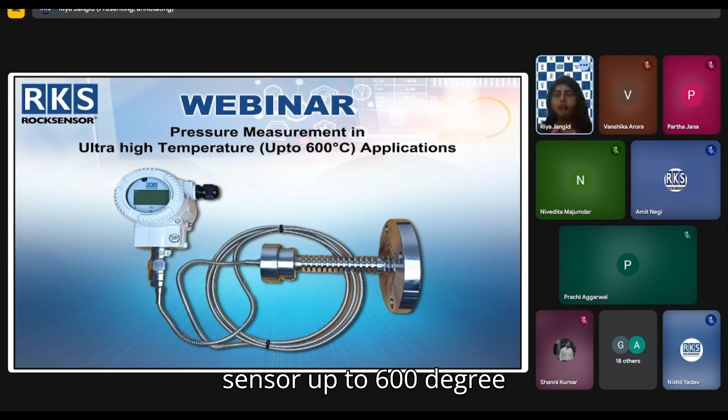Okay, so today's topic is pressure measurement solutions by Rocksensor up to 600 degrees Celsius. We have the smart solutions and the miniature version for industries where pressure measurement is required. So here are some solutions. You can see the images - this is our smart series and this is our miniature series.

Now, today what are we going to learn? We are going to learn the importance of pressure measurement and the types of pressure we deal in - gauge, absolute, differential pressure. What is the technology Rocksensor is currently using, and what products are we offering? What will be the application in the industry? What can we suggest to our clients? What can we guide our clients on? So this is the learning for today's session.

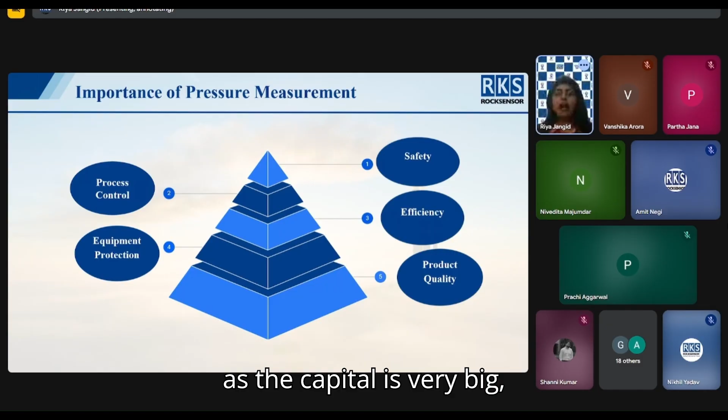First of all, we need to understand the importance of pressure measurement. In an industry, the capital is very big, right? We are investing our efforts, time, money - everything - in the industry. So we need a good quality product; its output must be efficient. These factors are based on some basic parameters on which the industry runs, like pressure, flow, level, temperature, and gas emissions into the atmosphere.

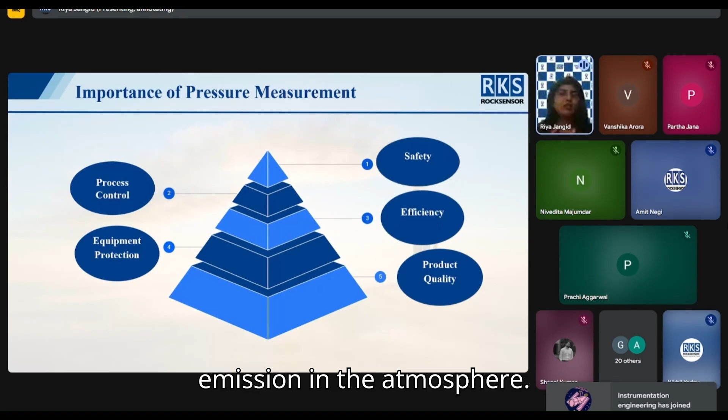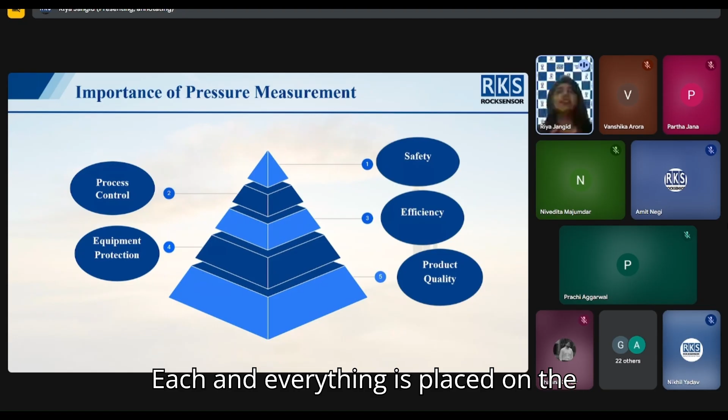So why is it necessary? First of all, it assures process control and safety in the industry. Second, we have efficiency and good product quality. As a general example, if you're baking a cake at home and the temperature or pressure is different, the cake will get burned or something will happen and the taste won't be good. Similar things happen in the industry, so it's very necessary to ensure the parameters that run the industry. Equipment protection is also there - everything is based on measurement, right?

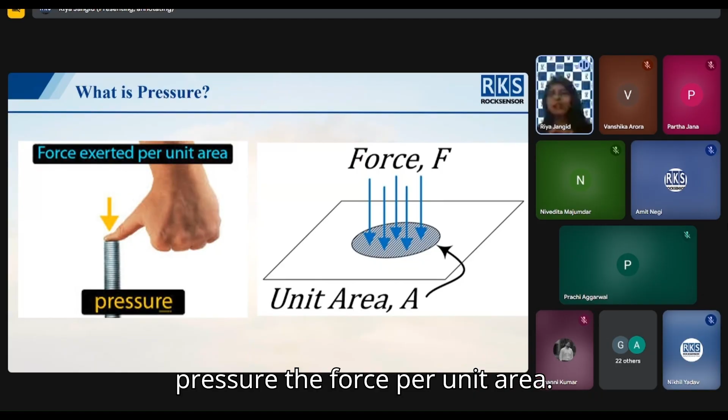Now, what is pressure? We already know pressure is force per unit area. Now how are we going to use this in our transmitter? There's the process, the things we use in this transmitter - we have different types of pressure measurement applications, and the pressures are different. So first we learn the types of pressure: gauge, absolute, and differential pressure.

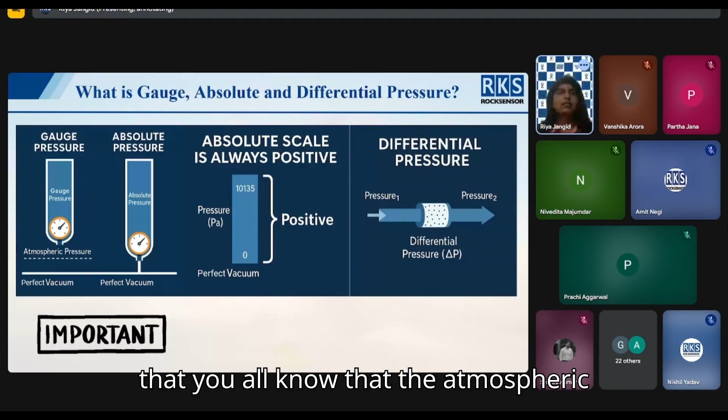What is gauge pressure? Gauge pressure is always measured with respect to atmospheric pressure. Now, as you all know, atmospheric pressure gets affected by altitude. The atmospheric pressure will be lower at higher altitude and higher at low altitude. So gauge pressure is directly affected by, or measured with respect to, atmospheric pressure.

Now, absolute pressure - the reference for this is perfect vacuum, which is minus 760 mmHg, right? Now what is the absolute scale? The gauge pressure can be negative or positive - the maximum it goes in the negative is minus 1 bar - but the absolute scale will always be positive, it cannot be on a negative scale.

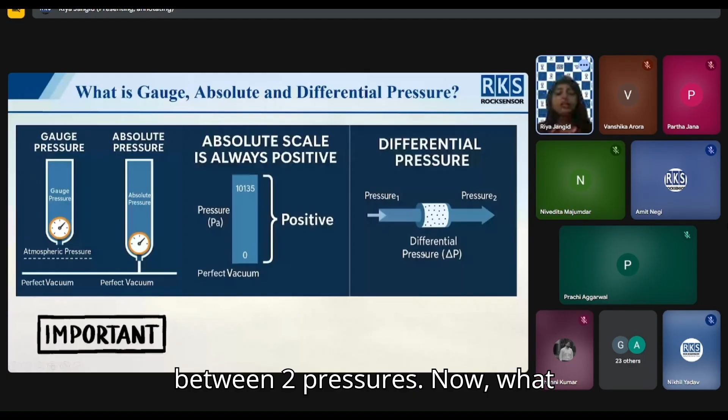Now, what is differential pressure? As the name suggests, differential pressure is the pressure between two points - one point at the higher side and one at the lower side. So it will always measure the difference between two pressures. Now the important thing here is that minus 1 bar, or minus 1 kg per centimeter square, is never a perfect vacuum.

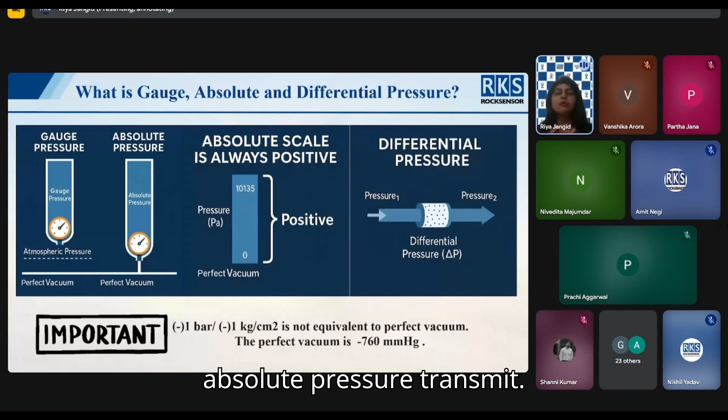A perfect vacuum is always minus 760 mmHg that we have to make our clients and users understand, the common thing for an absolute pressure transmitter.

Now moving ahead, what is the technology we are using? The technology is based on the monocrystalline piezoresistive silicon sensor. This is the transmitter, these are the parts of the transmitter, and this is the monocrystalline silicon pressure sensor.

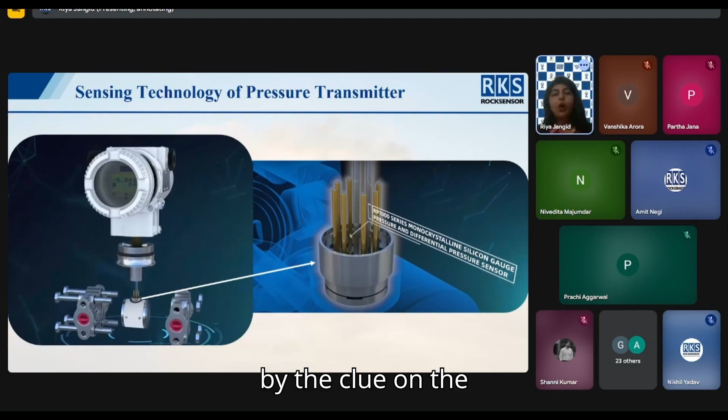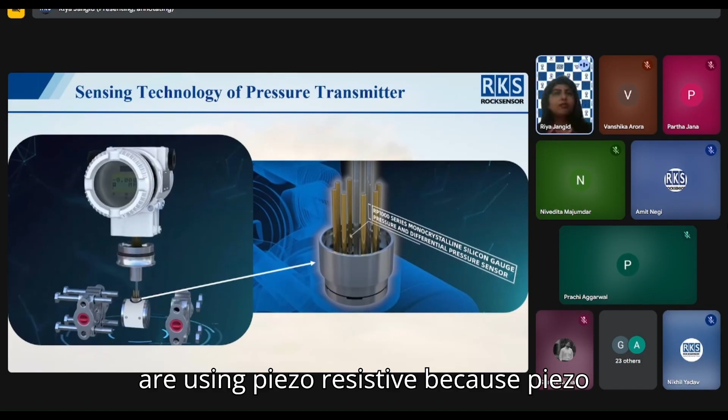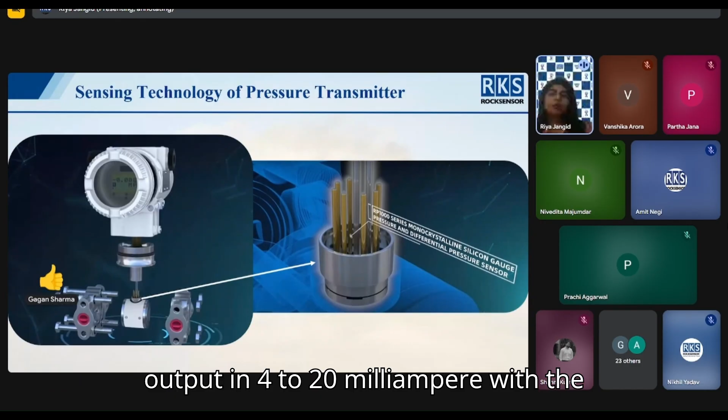Why we are using piezoresistive sensor? The pressure exerted by the fluid on the diaphragm is directly converted into the output signal of 4 to 20 milliampere. Piezo means pressure and resistive means resistive. Through this, we can easily measure the output in 4 to 20 milliampere with the help of a microprocessor because it is based on electronics.

Piezoresistive technology is based on the Wheatstone bridge. As we know, the Wheatstone bridge contains four resistances in which one is unknown. This unknown resistance is determined by the applied pressure of the fluid, and this results in our output.

Now, in the smart series pressure transmitter, we have gauge pressure transmitter, absolute pressure transmitter, and differential pressure transmitter. What features are we offering? First, we have high accuracy of 0.035% for these series, with temperature up to 120 degrees Celsius.

We have ATEX, CE, SIL certifications, NAMUR compliance, and IP67 rating. It is HART available, and has reverse polarity surge protection and anti-lightning function. It has push buttons on top of the transmitter, and you can easily configure or change settings through these push buttons.

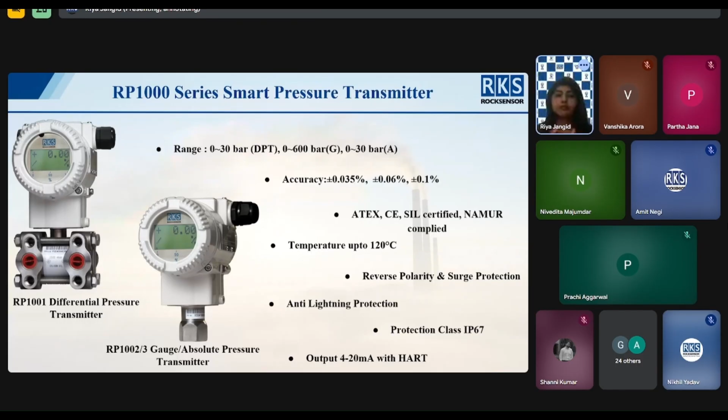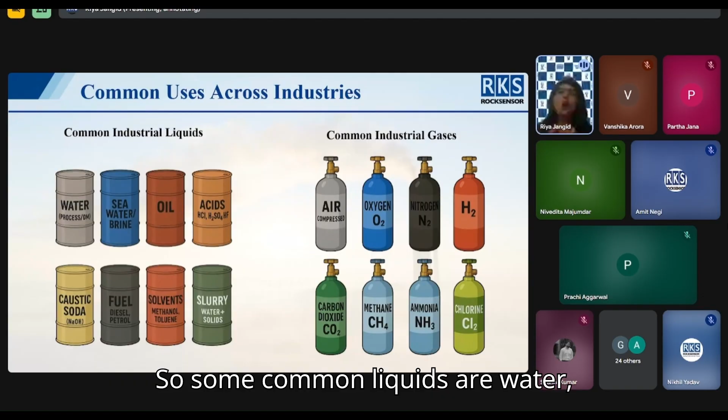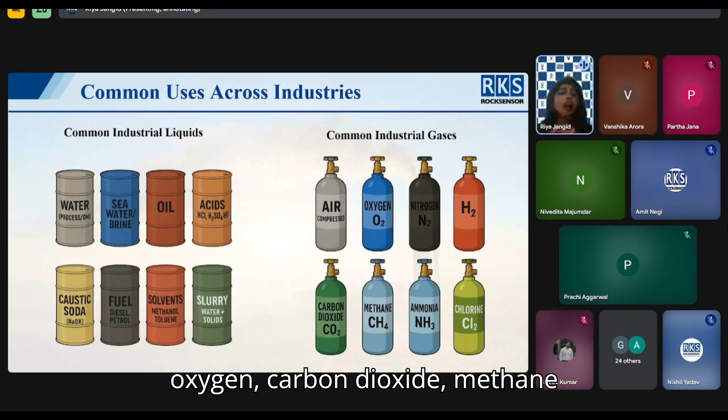Now, what are the common uses across industries? The transmitters can be used for liquids as well as gases. Common liquids are water, solvents, slurries, acids, and common industrial gases are nitrogen, hydrogen, oxygen, carbon dioxide, methane, and air, including compressed air.

Some applications can be handled like steam, where we can use impulse tubing, siphons, or condensate pots to lower the temperature, and then directly use the smart type PT. But some applications involve acids, or the process only requires high temperature, and we cannot directly use that. So here is the solution.

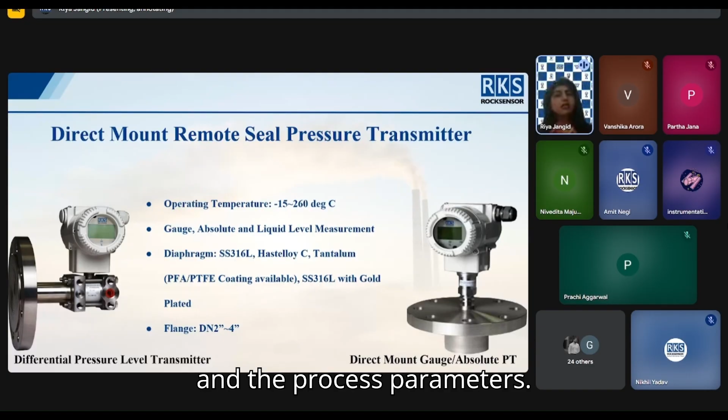Now moving ahead with the remote seal type pressure transmitter with capillary. In the previous type, the transmitter is directly mounted with no need for a mounting arrangement; the flange mounts directly in the process and the diaphragm contacts the media directly. In this case, we need to use a mounting arrangement because it is available with capillary.

The flange goes inside the process with the diaphragm in contact with the media, and through the capillary we can mount the transmitter in a remote area, at a distance of 1 meter, 2 meter, or 3 meter, depending upon the capillary length we provide to the client.

So we can use these transmitters directly; the application is the same where high temperature needs to be measured. The earlier one offered up to 260 degrees Celsius; this one is on the higher side, up to 350 degrees Celsius, and it can also be used from -100 to 100 degrees Celsius for cryogenic applications.

It is also available with different types of diaphragms: SS316L, Hastelloy, tantalum with a coating of PFA or PTFE. Flange size can be customized, and it has a capillary up to 12 meters.

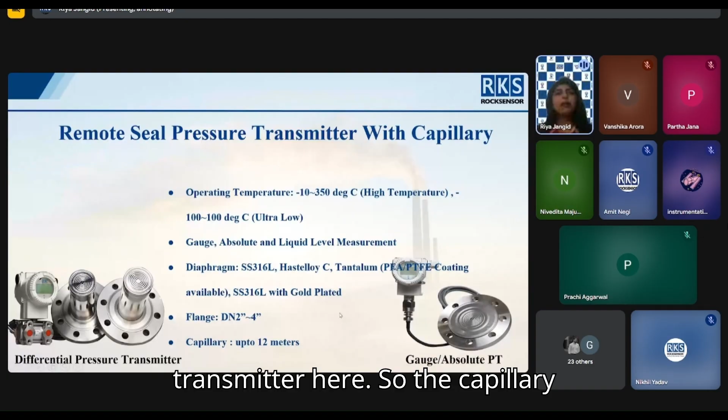So the capillary material is SS304. It is the standard one, and application in the industry. The application is similar to the previous one. It's just that depending upon the temperature, which process requires what temperature, what is the maximum temperature of that process, we have to choose wisely the solution.

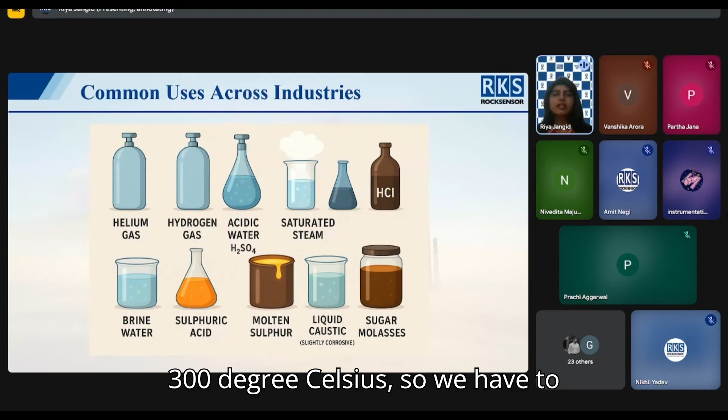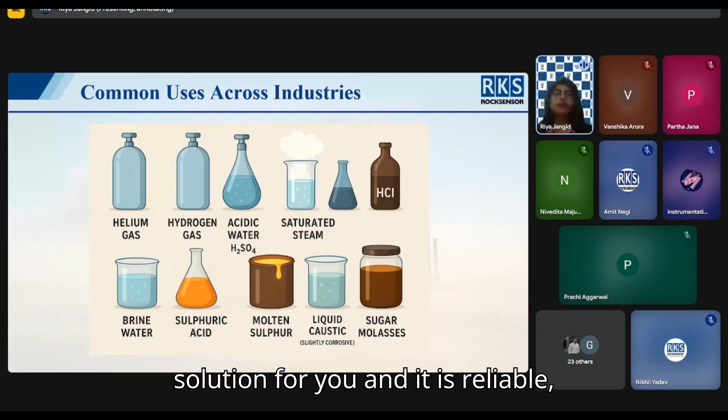So if the process temperature is 300 degrees Celsius, we have to wisely choose our remote seal type pressure transmitter, and also make the client understand that this is the best solution for you and it is reliable, accurate for your process to provide accurate pressure readings.

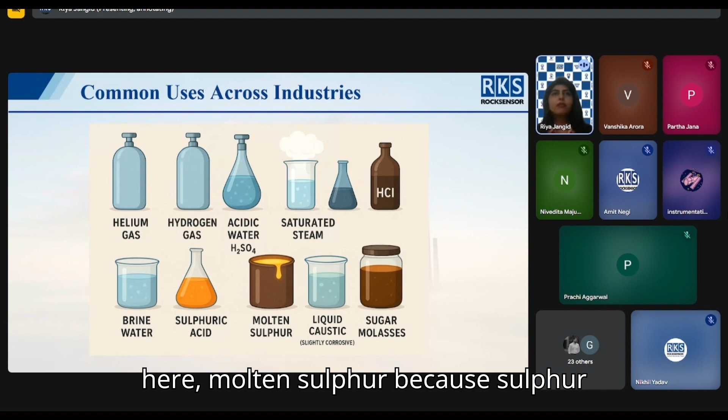So some common applications are mentioned here: molten sulfur, because sulfur temperature is already high, sulfuric acid, brine water, hydrogen gas, acidic water, sugar molasses. These are some common applications across the industries.

Now, the major application which we are going to discuss is hydrogen. As you all are aware, our government is empowering hydrogen power. It is the clean and green energy for the future. We are empowering our future, generating fuel through hydrogen.

Now, how is pressure measurement done in case of hydrogen gas? The challenge in hydrogen is that if we use the material directly with the hydrogen, for example SS material, it will cause hydrogen embrittlement. The hydrogen molecules are very small in size. They directly permeate the material surface and make cracks on it. So hydrogen atoms can easily go inside the surface of the material. For example, if you use SS as a material, it can easily go inside it, crack the diaphragm there, and cause leakage of the oil filling fluid inside the transmitter.

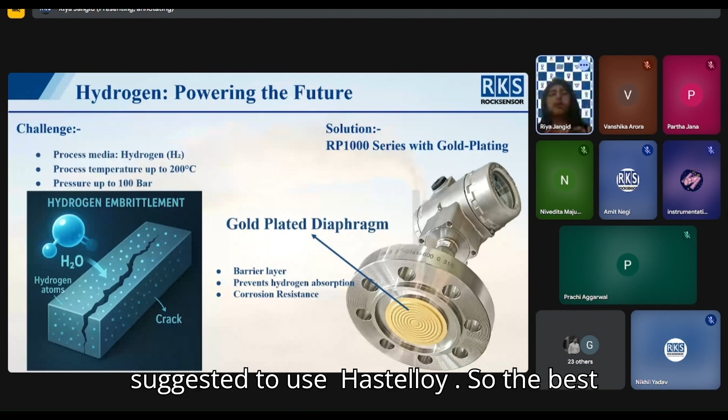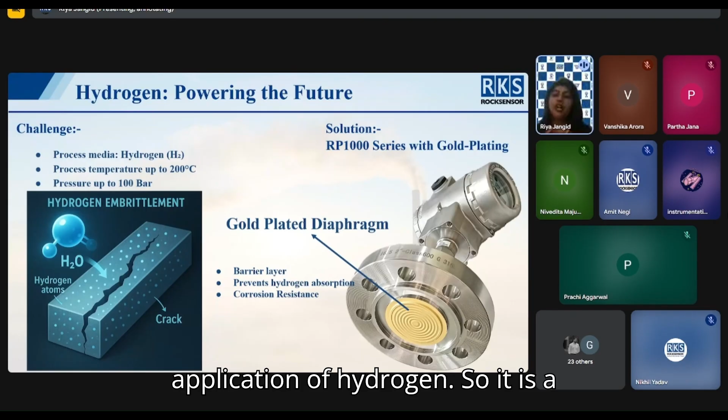And Hastelloy can be used for a shorter span of time, but it is also not suggested. So the best solution is the gold plated transmitter, which can easily be used to measure pressure in hydrogen applications. It is a great product. You can easily tell your clients that we use such innovative products because hydrogen is the future of the industry, and we can easily use this transmitter to measure the pressure.

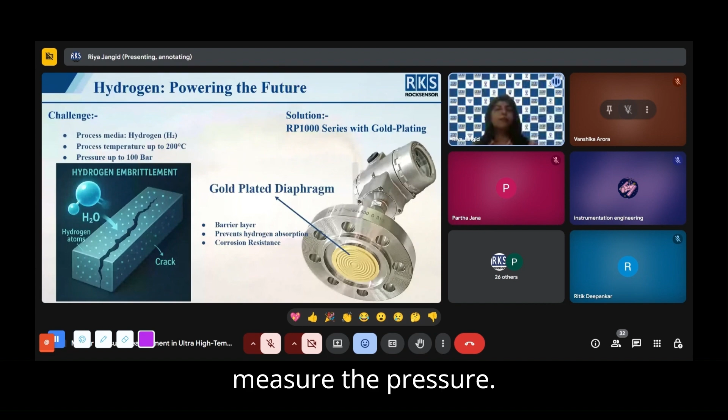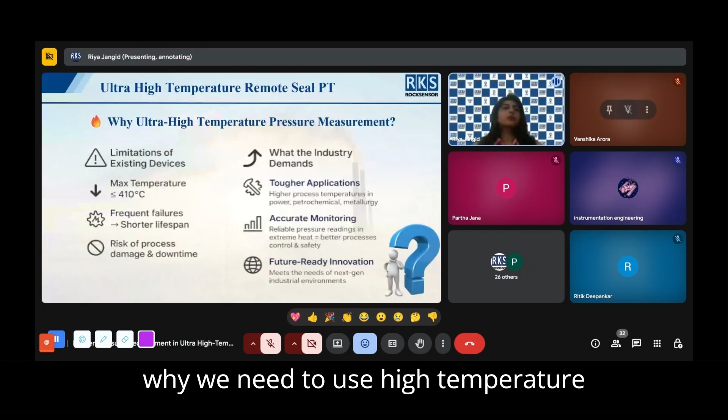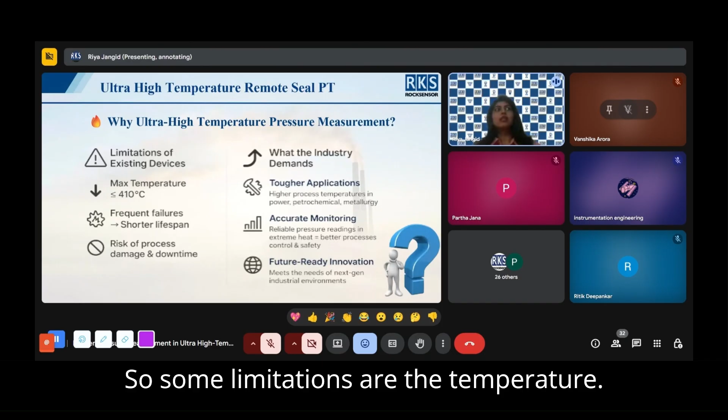Now we are moving ahead with our high temperature solution. Why do we need high temperature pressure measurement? We have so many limitations in the industry. Some limitations are related to temperature. Some devices exist with a limitation of 400 or 450 degrees Celsius, and the maximum temperature is up to 410.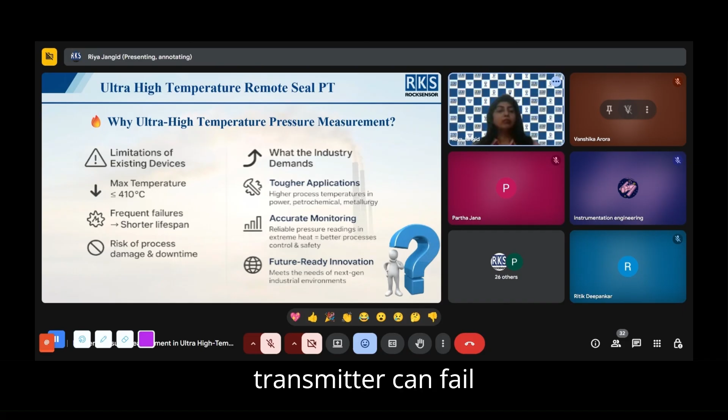Due to wide exposure to the atmosphere or to high pressure and high temperature, the transmitter can fail in that case, and there will be a shorter lifespan of the transmitter. This will increase the damage of the process.

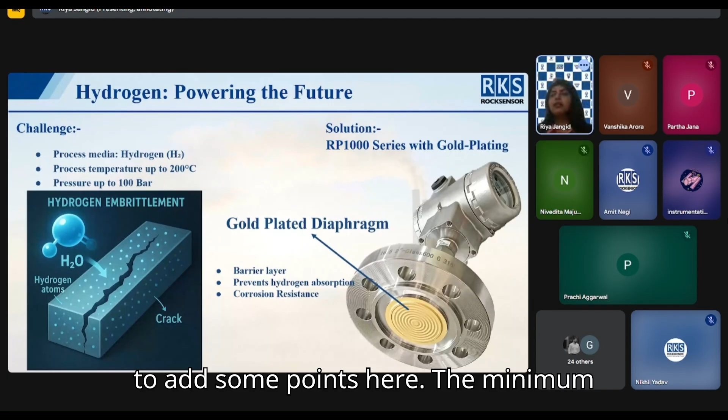In the previous slide which we were discussing for hydrogen, I would like to add some points here. The minimum coating will be 3 micrometers, and it can be customized up to 20 to 25 micrometers depending upon the exposure and how much atmosphere there will be. So this is the coating we provide in this.

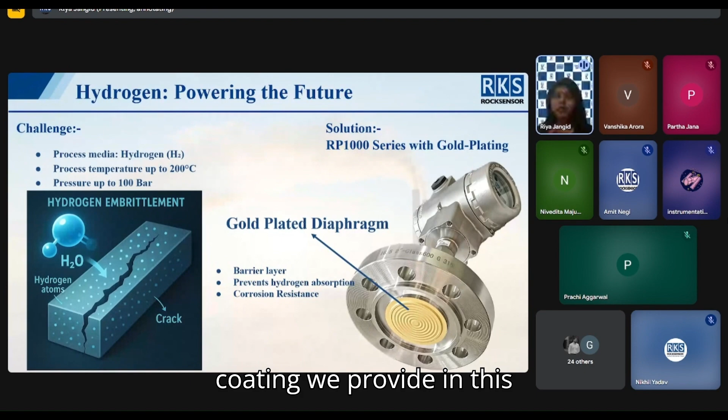Now, moving ahead with the ultra high temperature pressure measurement. So what is the demand? For the applications which cannot be measured directly, this is a good solution. We can easily get the accuracy, reliability, and for tougher applications, we can easily provide the solution.

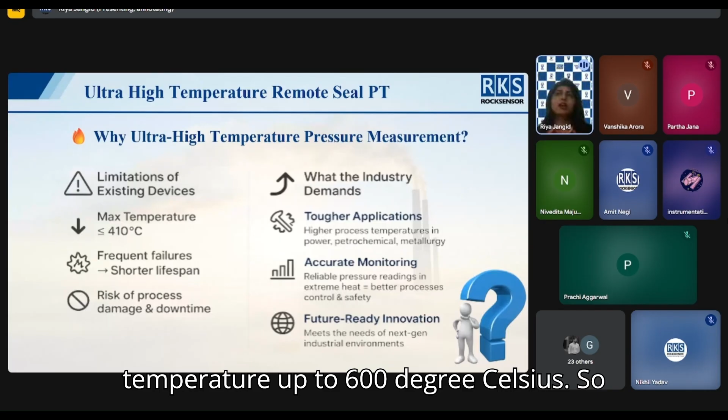Accurate monitoring will be there, and it is the future innovation for the industry, because some applications work on higher temperature up to 600 degrees Celsius. So there is a difficulty in measurement of the pressure. This is a good solution for the industry.

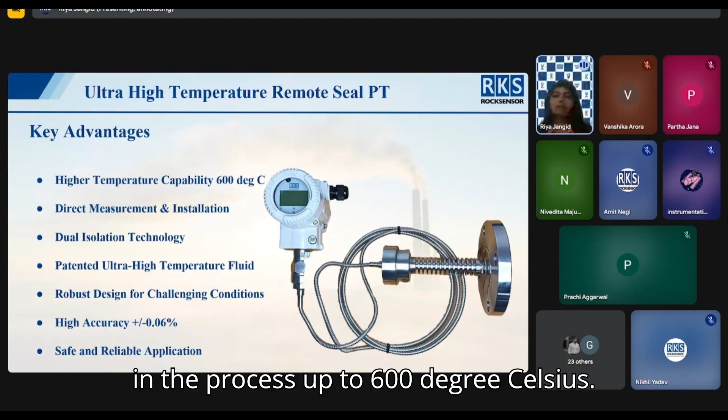Now, what are the advantages? The first advantage is that it works up to 600 degrees Celsius. We can use it directly in the process up to 600 degrees Celsius. It is a direct measurement, and it is based on the dual isolation technology. We have a patented solution, filling fluid in this, which is for high temperature, and the accuracy is up to 0.06%, and it is safe and reliable for the application in which we are going to use it.

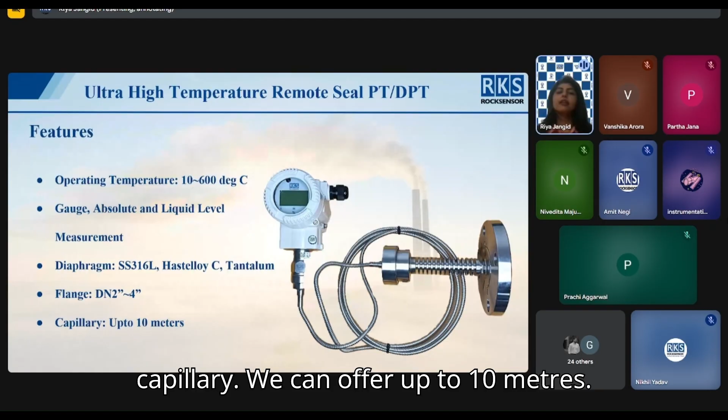Now, features are there. Its operating temperature is from 10 degrees to 600 degrees Celsius. It can be used for gauge, absolute, and liquid level measurement. The diaphragm is SS316L, Hastelloy C, Tantalum, and flanges range from 2 inch to 4 inch. Capillary we can offer up to 10 meters.

Now, what is the technology behind this ultra high temperature pressure solution? First of all, it is a direct measurement for high temperature solutions. It uses specialized heat resistant fluid. It is a patented technology, and the filling fluid is a high temperature filling fluid.

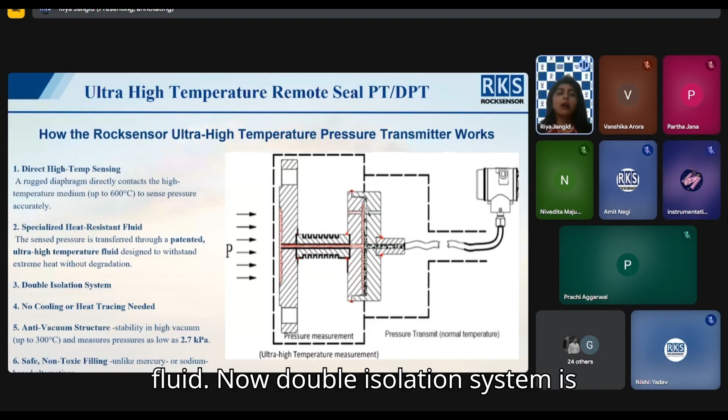Now, the double isolation system is there. The pressure from the high temperature measurement diaphragm is transferred through a special high temperature fluid to an isolation diaphragm. From this isolating diaphragm, which contains normal temperature silicone oil inside a capillary, it is used to transmit the external pressure to the transmitter. This is the double isolation technique, and in this no external cooling or heating is required.

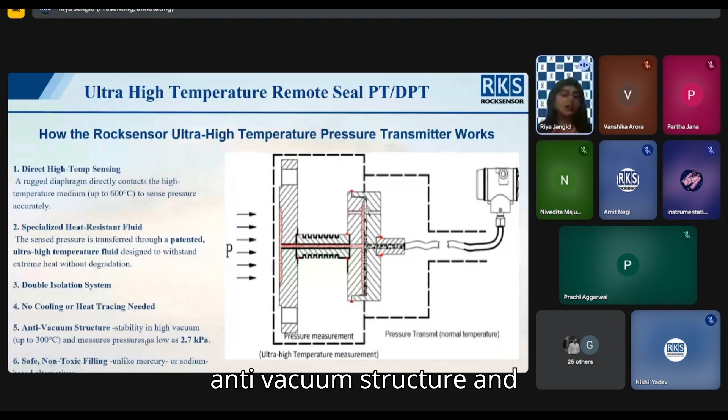It is also available with anti-vacuum structure, to maintain the performance under low pressure and high temperature. So it is safe with this anti-vacuum structure. It is available with safe and non-toxic filling, unlike mercury and other fillings. So the filling fluid is safe, reliable, and non-toxic.

Let's get through some examples or applications of this. The application is sulfur vapor at 600 degrees Celsius. The operating temperature range of this device is from 10 to 600 degrees Celsius.

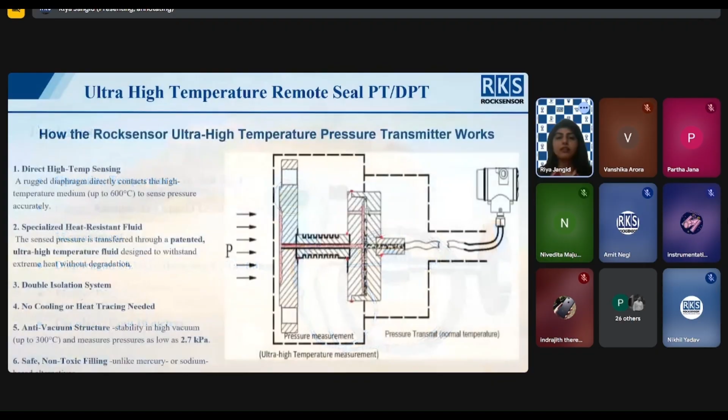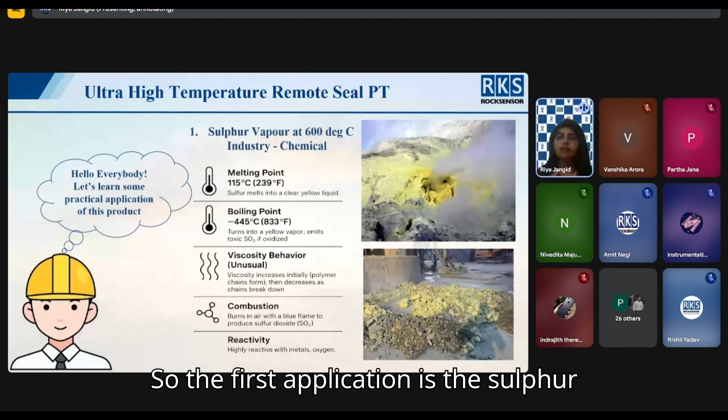Some applications are there. The first application is sulfur vapor at 600 degrees Celsius. As we know, in the chemical industry, sulfur is required for so many applications like sulfonation, hydrogen sulfide, sulfuric acid, and rubber manufacturing, among other things. The melting point of sulfur is below 115 degrees Celsius, and sulfur turns into vapor above 445 degrees Celsius, and it emits toxic SO2 if oxidized.

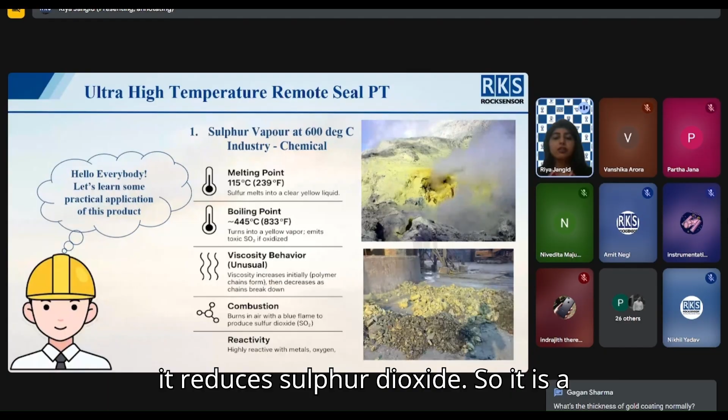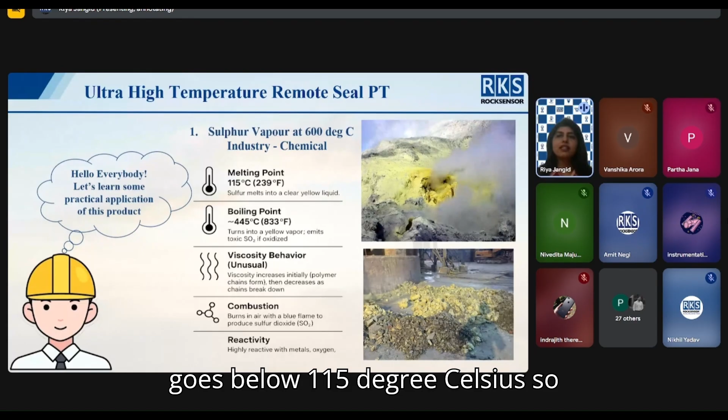If it's combined with air, it always flames into a blue flame, and it produces sulfur dioxide. So the viscosity behavior of sulfur is very unusual. If it goes above 115 degrees Celsius, it starts melting into a yellow color, and if it goes above 445 degrees Celsius, it starts turning into vapor. So the viscosity behavior is very unusual for sulfur.

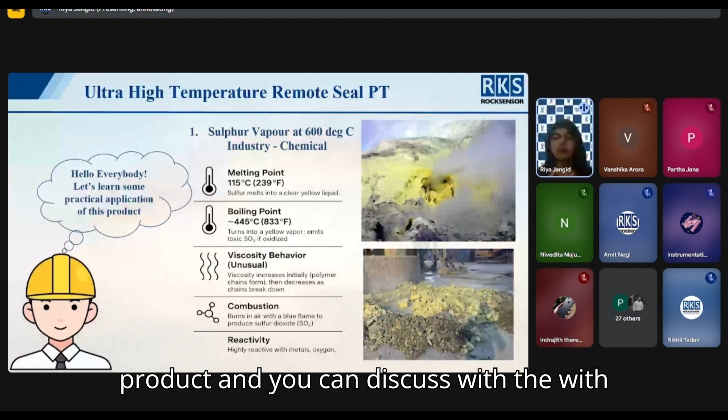So we have proposed this 600 degree ultra high temperature solution for this application. We can also inform and guide our clients that they can easily use this product, and they can discuss with us for the solution. This is the application for this, because this transmitter is built for 600 degrees Celsius. That's why we have suggested this model to the customer.

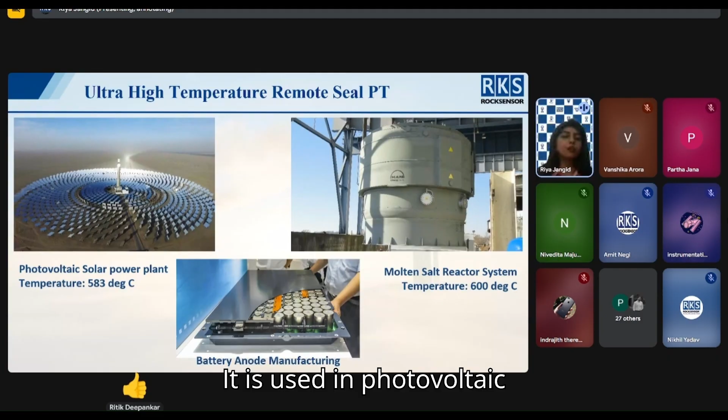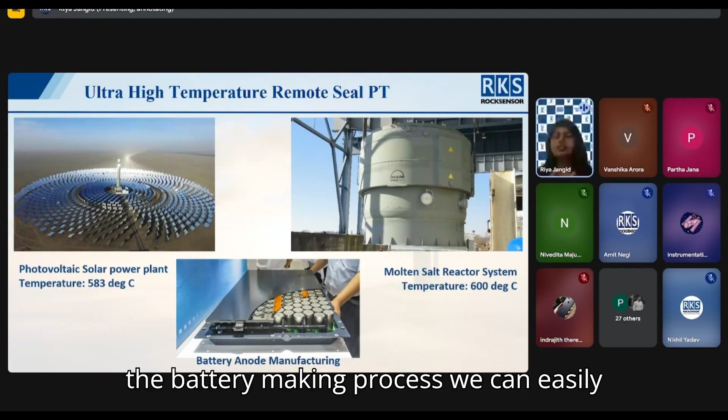Now, some more applications are there. It is used in photovoltaic solar power plants where the temperature is 580 degrees Celsius. It is also used in molten salt reactor systems where the temperature is 600 degrees Celsius. In energy battery making, the battery making process, we can easily use this product because the temperature will be on the higher side, up to 600 degrees Celsius.

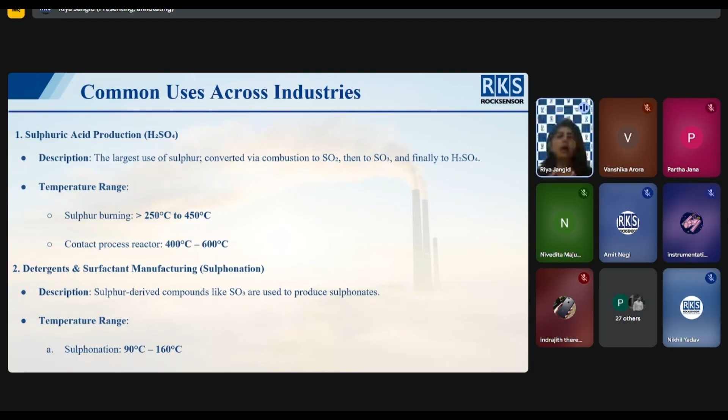Now, what are the common uses across industries? In sulfuric acid production, where the temperature goes from 450 to 600 degrees Celsius, we can easily use and inform our clients for the pressure measurement solution.

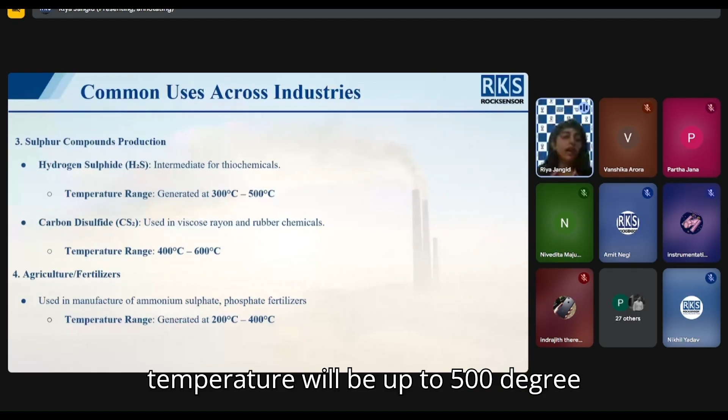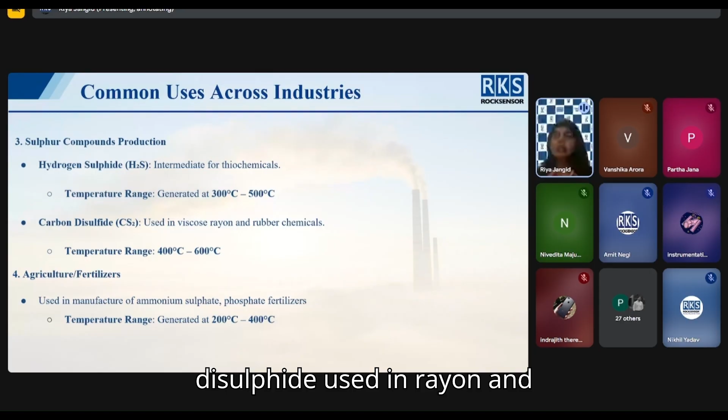In the making of detergent, surfactant manufacturing, sulfonation, the temperature will be up to 160 degrees Celsius. Then sulfur compound production, hydrogen sulfide, as discussed earlier, also up to 500 degrees Celsius. Carbon disulfide, used in rayon and rubber chemicals, has a temperature up to 600 degrees Celsius.

In agriculture, the temperature is up to 400 degrees Celsius for ammonium sulfate and phosphate fertilizers. So we can easily guide our clients for this solution.

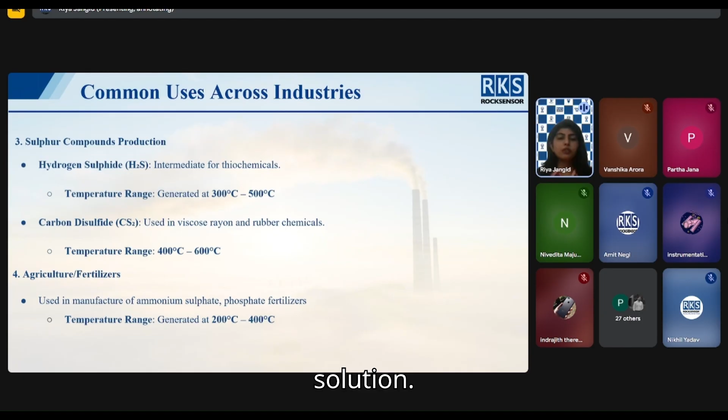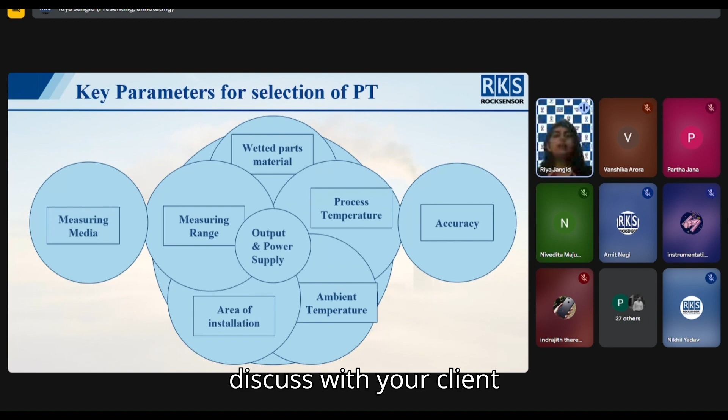Now, some key parameters for the selection of pressure transmitters. I would suggest that you should always discuss with your client the parameters required for a solution, because we always know the pain point of the customer, but we discuss his pain point and are never able to give the correct solution. Why? Because we don't take the actual details from the customer.

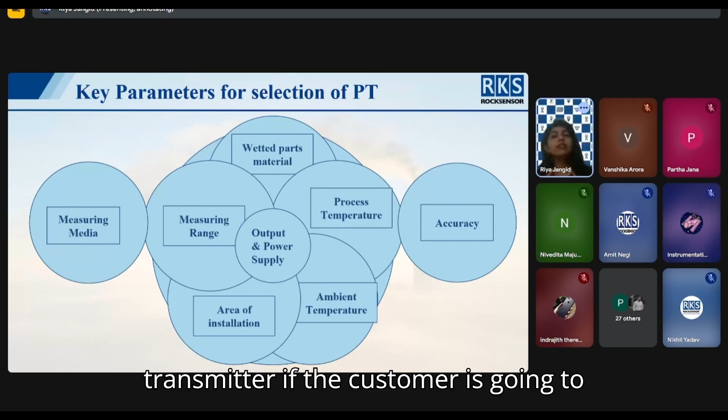Sometimes we only know the customer needs a gauge pressure transmitter, but the customer may be going to use it in vacuum, because the customer doesn't know which type of application or product we have to use to provide the solution. So some parameters are there.

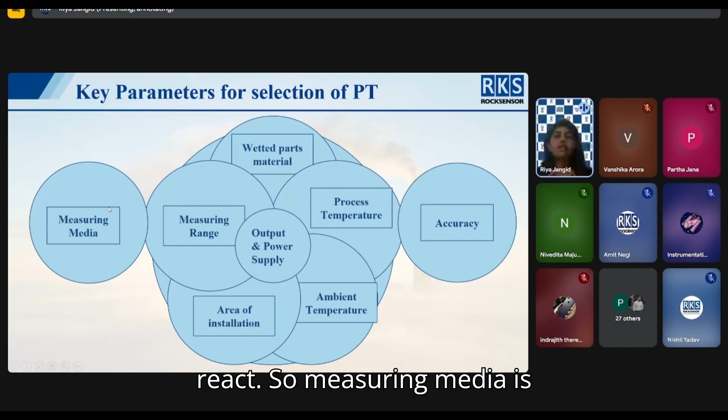Measuring media. Why is measuring media required? Because it is directly connected with the wetted parts, like chlorine gas or chlorine. In chlorine, we cannot use SS316L because it will react. So measuring media is very important. We have to select the wetted part accordingly, and it will also guide us which type of transmitter to give, with the wetted part or diaphragm material.

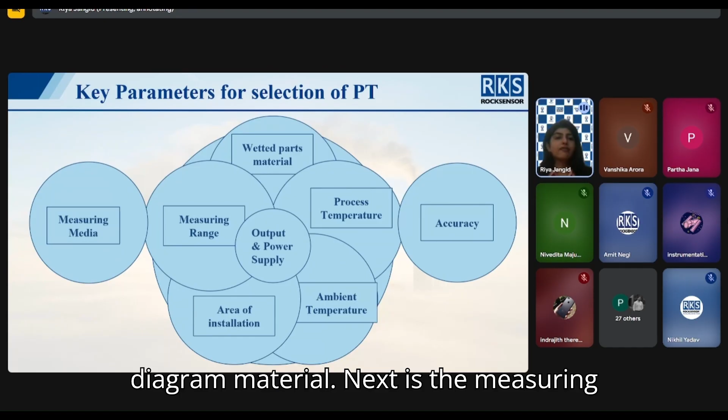Next is the measuring range. The measuring range will guide us to select the correct span.

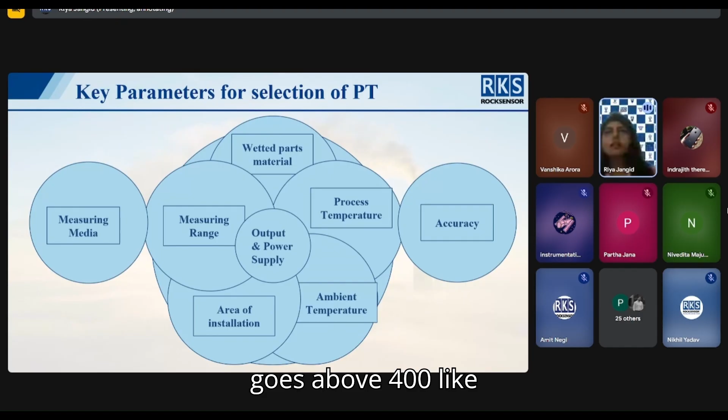Process temperature also plays a major part. If the process temperature is up to 80 degrees Celsius, we can directly use the thread mount type PT. If the temperature is up to 200 degrees Celsius, we can use flange mount type direct mount PT. If above 200 or 300 degrees Celsius, we can use the capillary type transmitter. If the process temperature goes above 400, like 450 or 600, we can use the ultra high temperature PT. So it plays a very important factor in selecting the correct solution.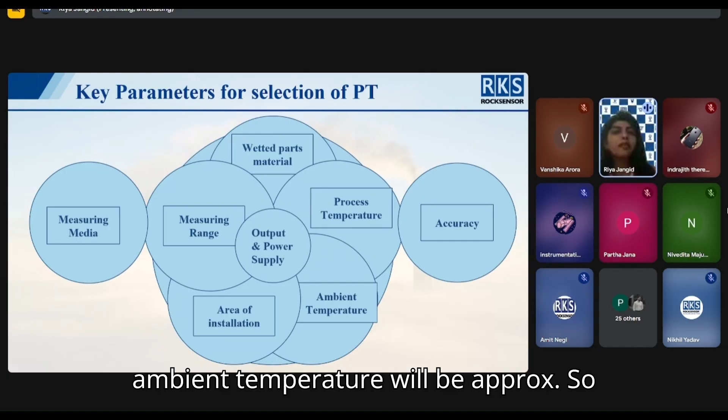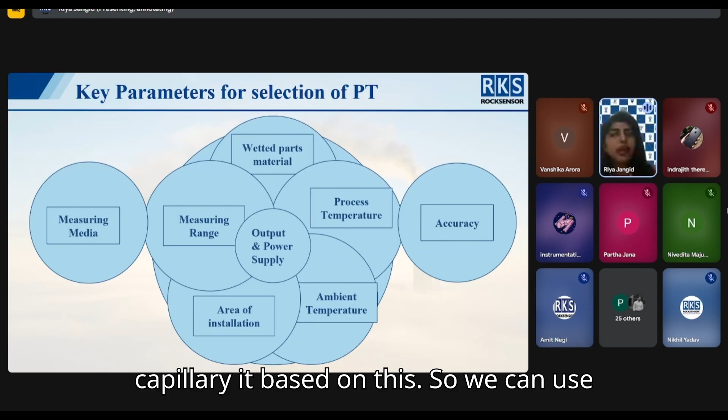Now, what affects the ambient temperature? Ambient temperature also plays an important role, because the area where we are going to install might have a higher process temperature, so the ambient temperature will be approx 100 or 90 degrees Celsius. Based on this, we can use capillary to mount our transmitter or display on a remote area, so it will not get affected by the ambient temperature or the process outer temperature.

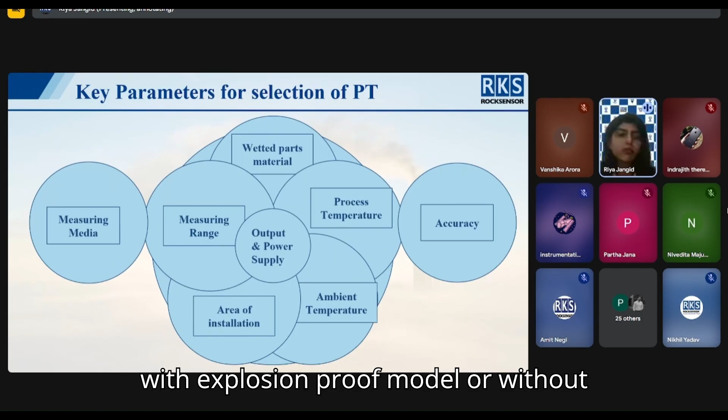Now, area installation - where are we going to install the PT? Is it in a non-hazardous area or a hazardous area? This also guides us to select the PT with an explosion proof model or without.

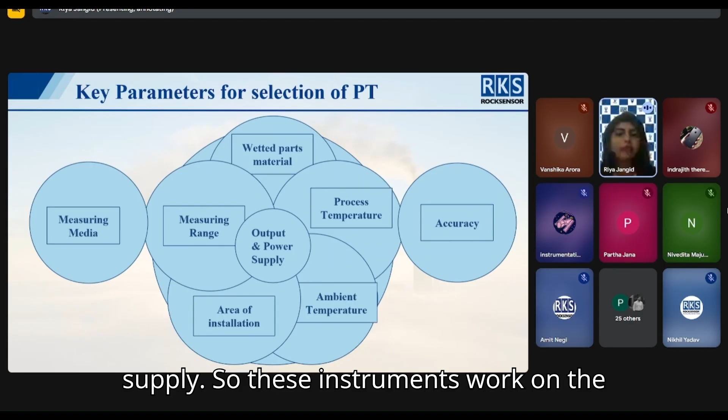Then output and power supply. If the customer's power supply asks for AC supply, these instruments work on DC. So we can suggest that they use an SMPS to convert AC to DC.

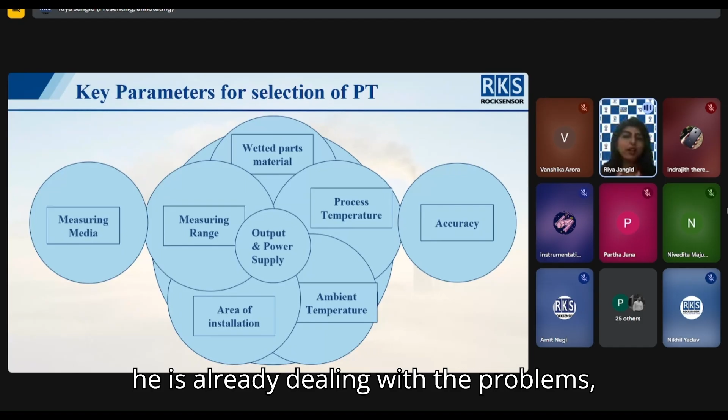These are some parameters for the selection, and they are very important for a team to select the correct solution, because we don't want to create pain for the customer once again, since they are already dealing with problems. We have to give them the solution. The correct solution comes when the information is correct. These are some parameters which are very important for the selection of transmitters.

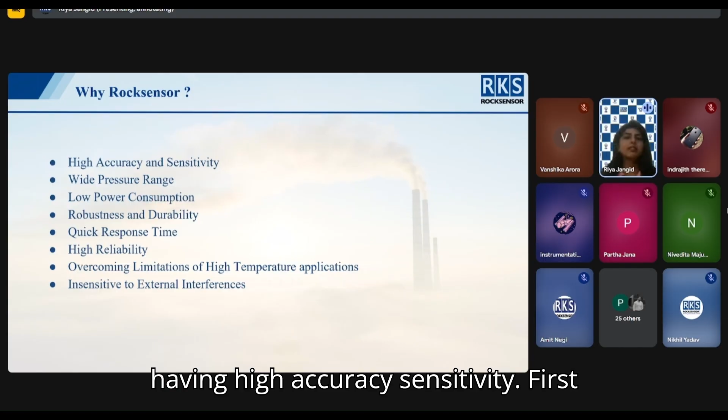Now, why are we going to use our product? It's based on having high accuracy and sensitivity. First of all, we have a very wide pressure range and low power consumption, so we are overcoming the limitations of high temperature applications.

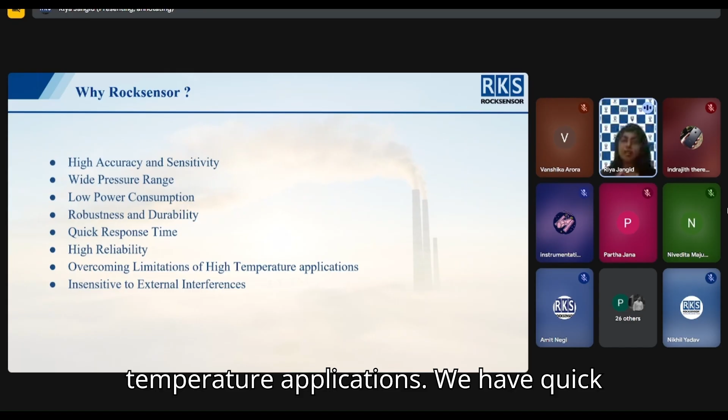We have quick response time. Our service, sales, and product team is a good team which will provide pre and post sales support to the client, and it is insensitive to external interferences. This is the reason we can use the transmitter.

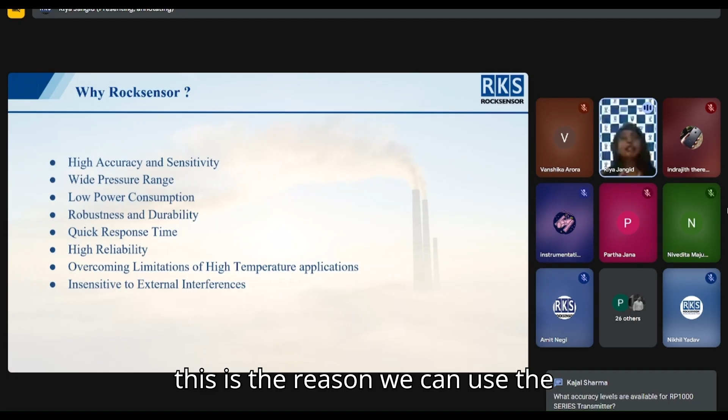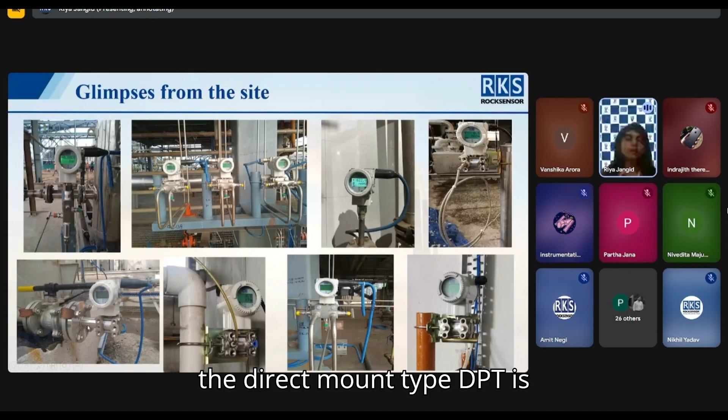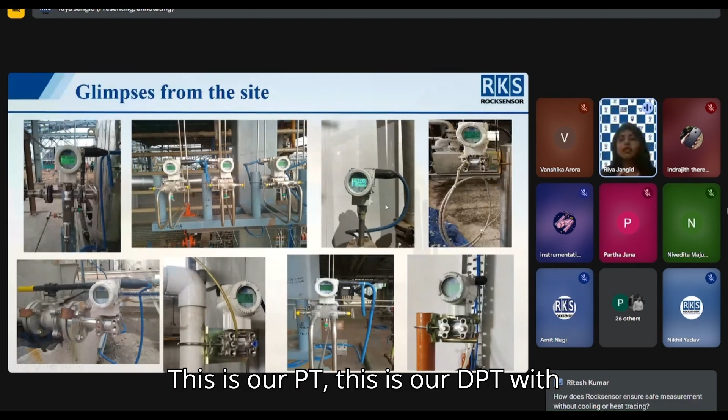Now these are some glimpses from the site. Our transmitter is installed at site. The direct mount type DPT is installed, and here also the PT is installed. The DPTs are installed - this is our PT, this is our DPT with capillary, you can see the capillary here. And the process flange is going into the process. So these are some glimpses from the site.

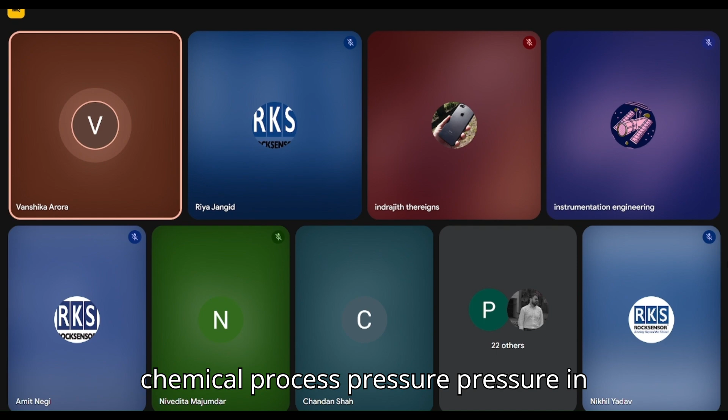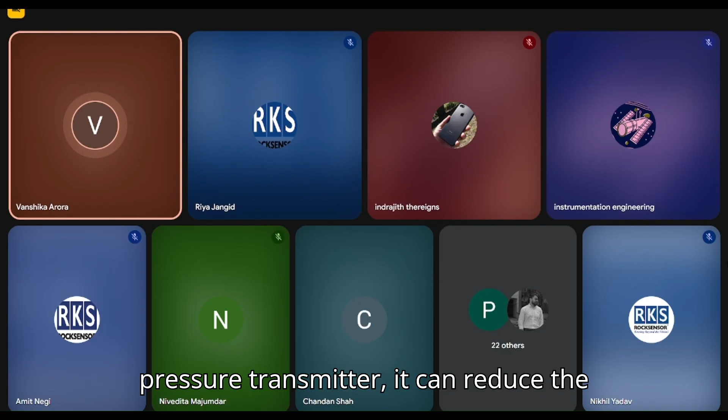Abhay asked, could you please explain why the response time of a pressure transmitter is critical in high temperature chemical processes? Situations change drastically in chemical processes and can lead to catastrophic effects. That's why it's very important to measure the pressure with high response time. Our remote seal pressure transmitters can provide that high response time, reducing drift effect because all the assembly is manufactured in-house, providing accurate output.